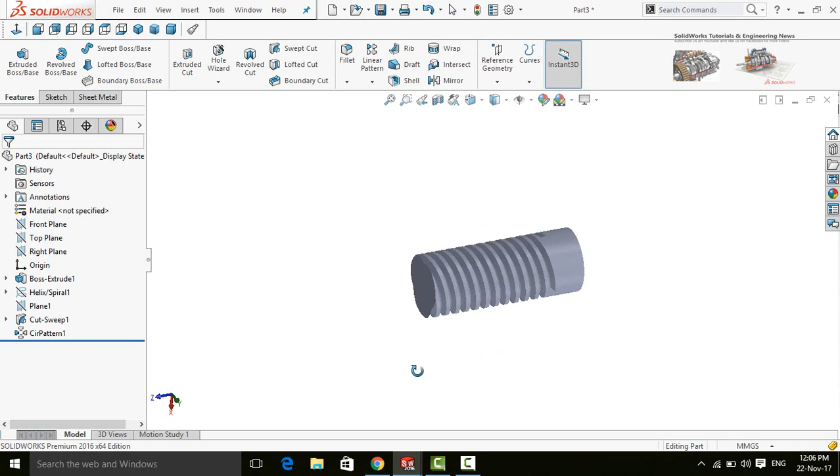Assalamu alaikum friends. In this video I am going to show you how to create multiple number of threads on a single bolt in SolidWorks. So keep watching this video till the end.

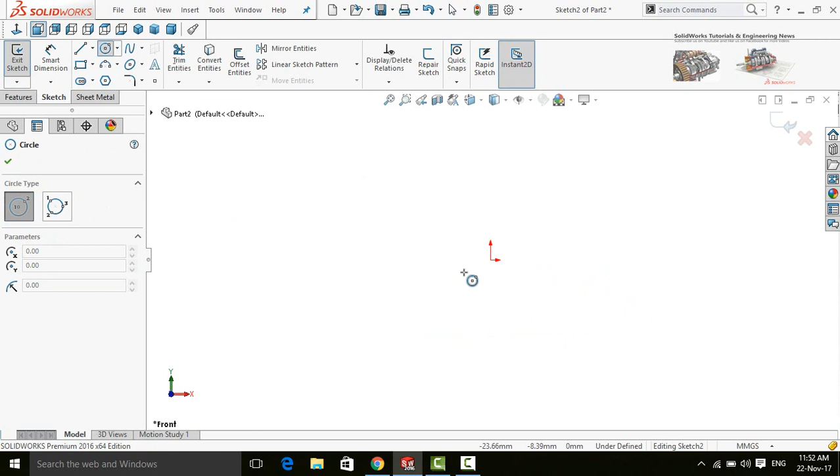Let's start. First of all, we need to have a sketch on the front plane. Draw a circle and start it from origin. Now define it for 40 millimeters. Go to the features tab and extrude it up to 100 millimeters. Press OK button.

Now click on this face and select sketch. Select this circle and press the convert entities button. Go to the features tab and select the curves button. Now select helix and spiral. Select your height, pitch and start angle. So our height is 80 millimeters, pitch is 20 millimeters, and start angle is 360 degrees. Press OK button.

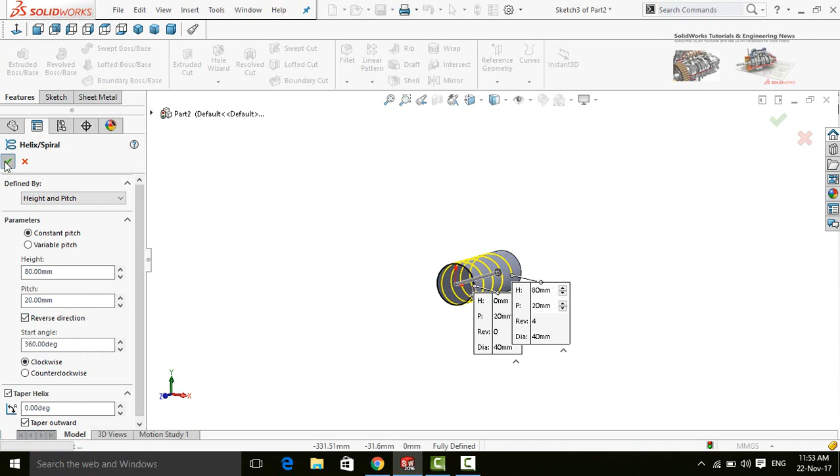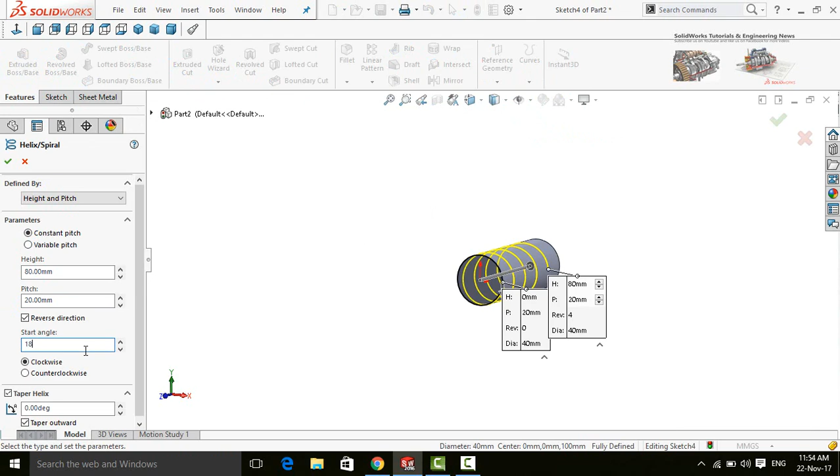Again click on this face, select sketch, select the circle and press convert entities button. Go to features tab, select curves button and again select helix and spiral. This time the start angle is 180 degrees. Now you can see one helix is starting from this point and the other one is starting from this point. So press OK button.

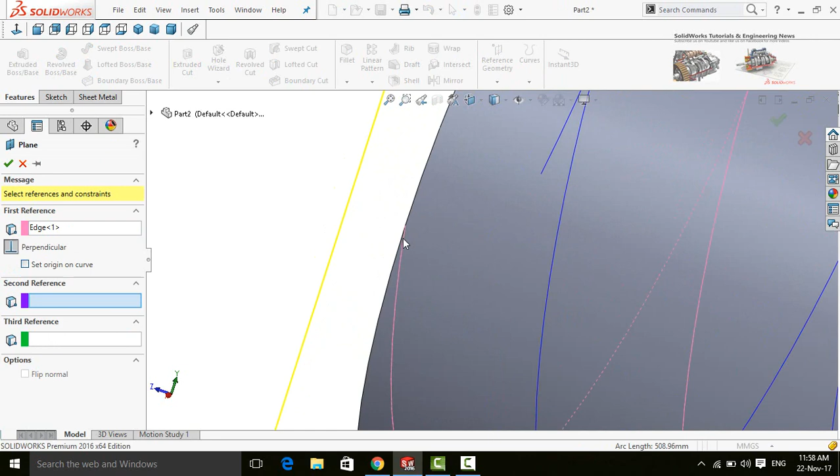Now we have to create two planes. So click on reference geometry and select plane. Select this helix as the first reference and then this point as the second reference. Press OK button.

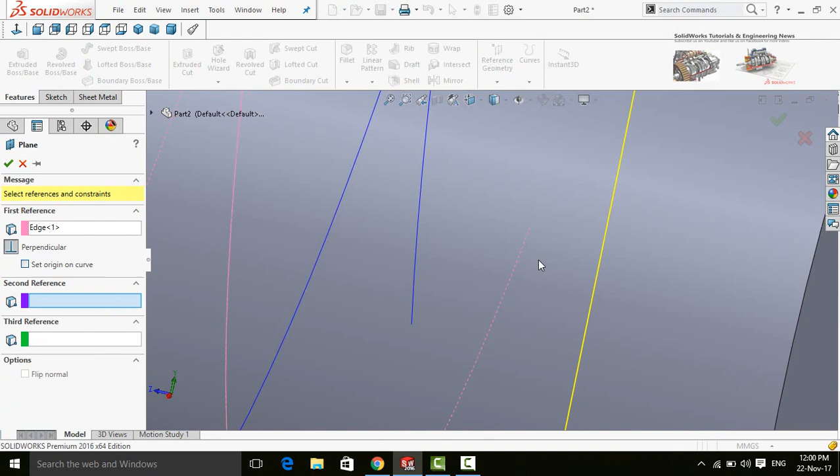Again click on reference geometry and select plane. This time select the other helix as first reference and this point as second reference. So it is fully defined. Press OK button.

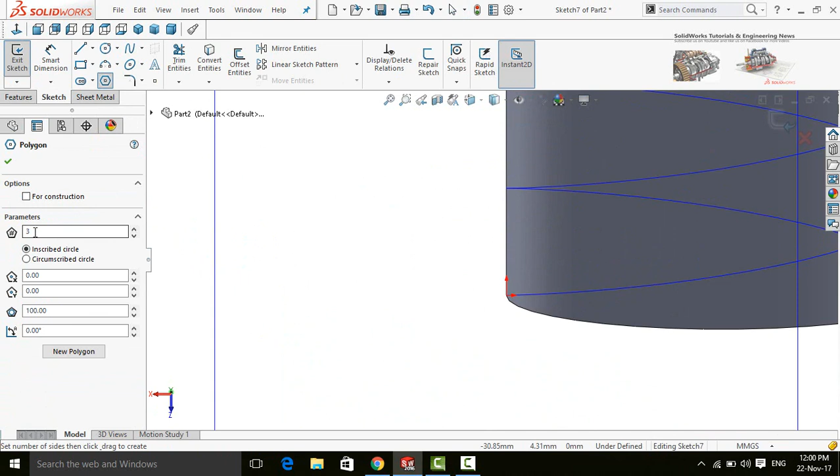Now sketch on both of these planes one by one. Sketch on it and make normal to. Draw a polygon, number of sides are 3, and start it from origin. Define it, this length should be 6 millimeters. Now save and exit from sketch.

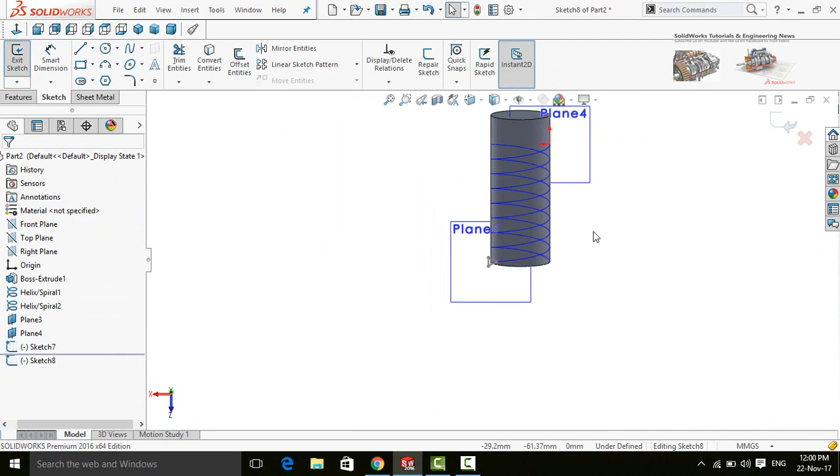Similarly sketch on plane 4, make normal to, and draw the same polygon with 3 sides. Start it from origin. Define it 6 millimeters. Save and exit from sketch.

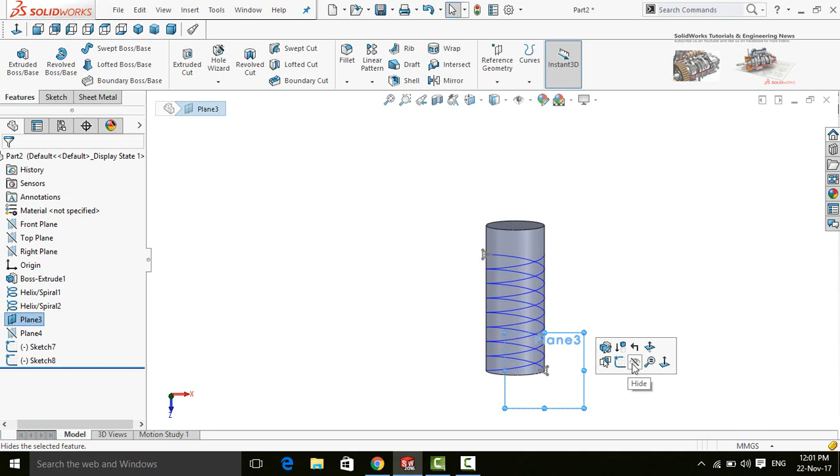Now one by one hide both of these planes. Go to features tab and select swept cut. Select this sketch and then this helix. Press OK button.

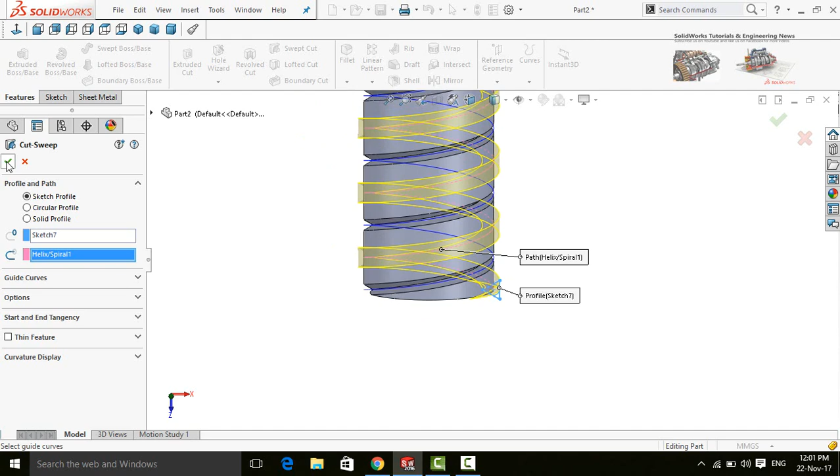Again select swept cut command. Select this sketch and then this helix. Press OK button. Now click on this helix and hide it. Similarly click on the other helix and hide it too. So now you can see how easily two threads, or dual threads, have been created on a single bolt.

So there is another way to create multiple number of threads on a single bolt. Let me show you how. For that, again create a new part.

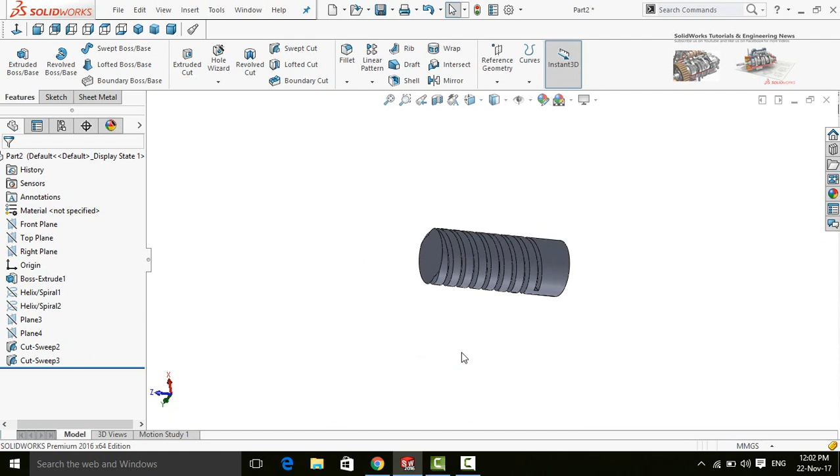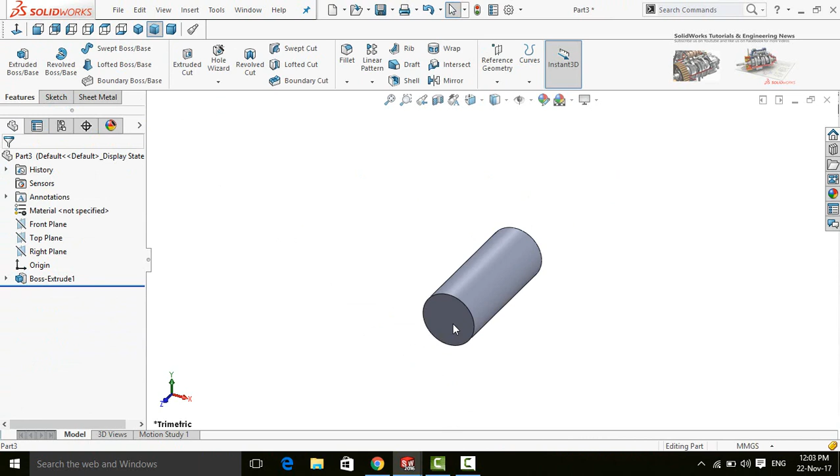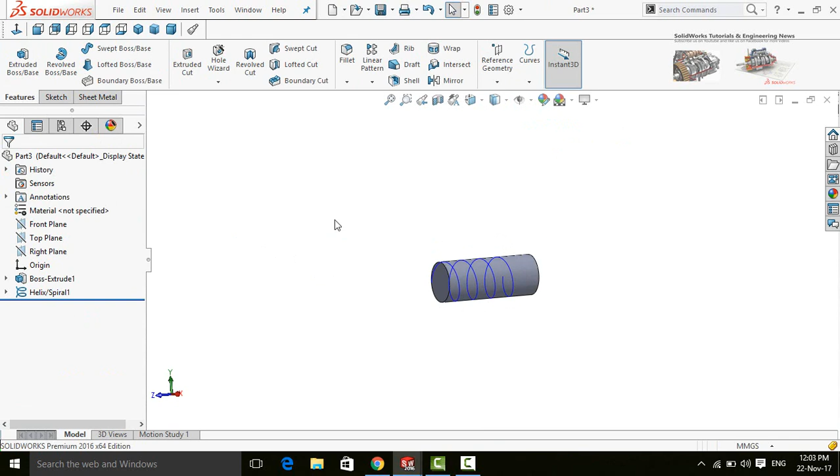Set the height and pitch and start angle. Press OK button. Now go to reference geometry and select plane. Select this helix as first reference and then this point as second reference. Press OK button. Sketch on this plane 1, make normal to, and draw a polygon with 3 sides.

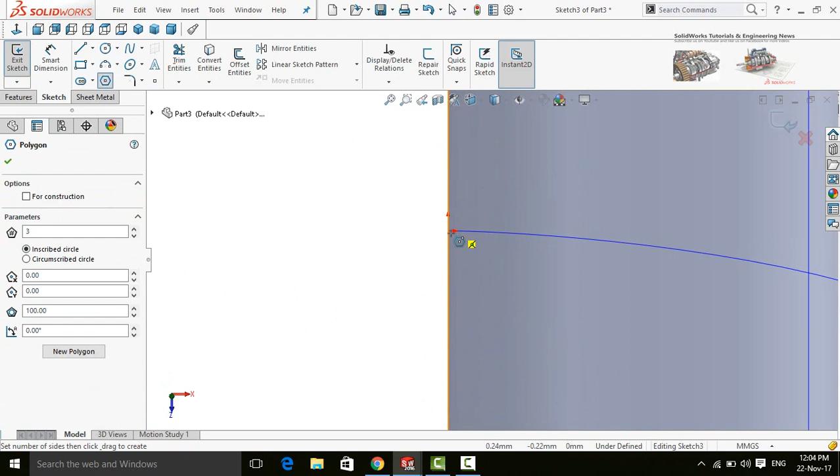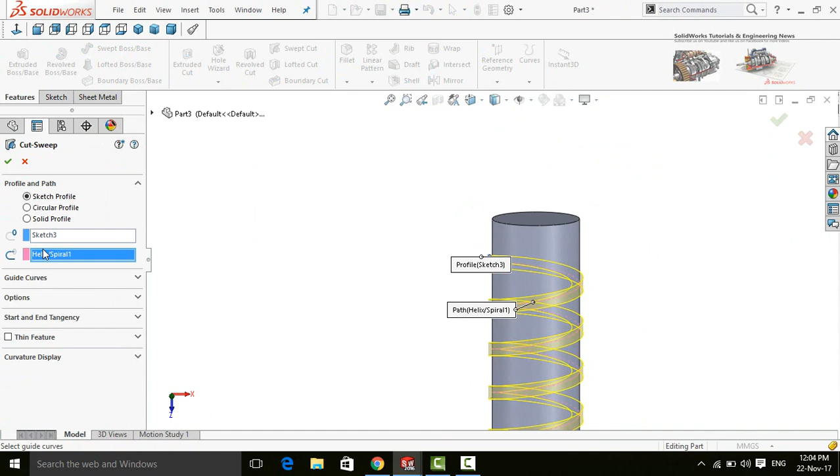Start it from origin. Define it 6 millimeters. Press OK button and save and exit from sketch. Hide this plane. Select swept cut command from features tab. Select this sketch and then this helix. Press OK button. Hide this helix.

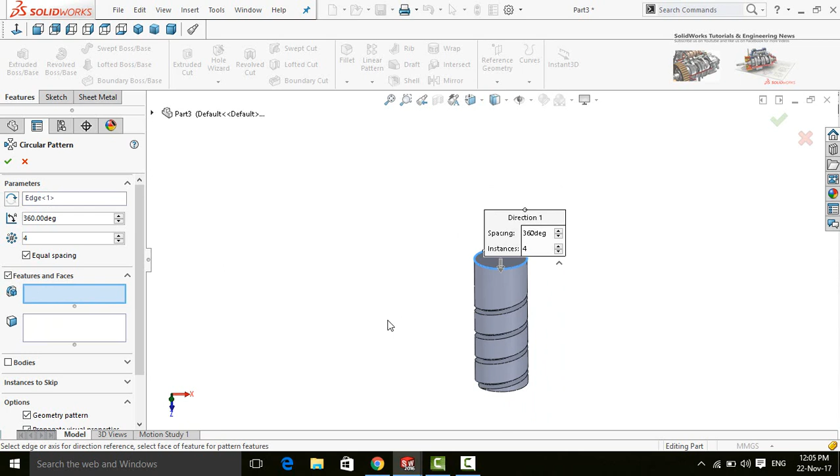Go to features tab and then click on this arrow below the linear pattern button and select circular pattern. Select this box pattern axis and click on this circle. Now click on this box, drop down this arrow and select swept cut. Number of threads are 3 or 4, whatever you want, and press OK button.

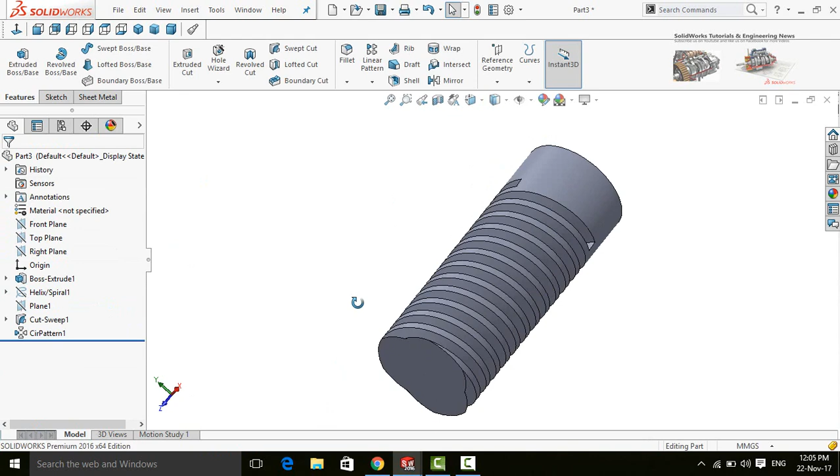So at this time, 3 number of threads have been created on a single bolt. One, 2 and 3.